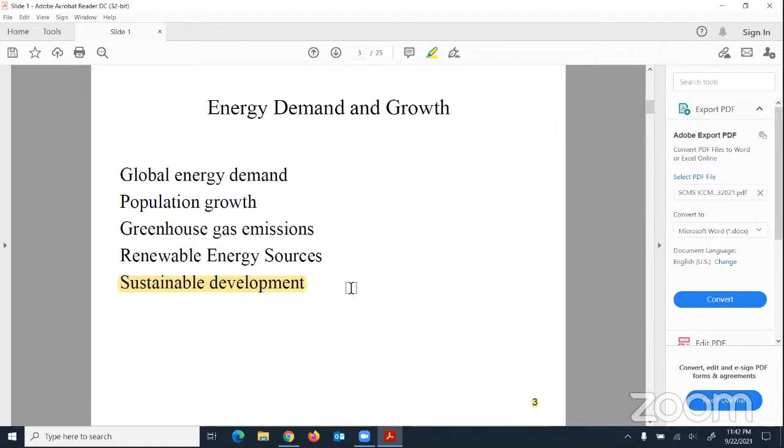I'll go over the first few minutes highlighting developments in the power plant sector. What you are seeing here is a steam power plant, which we teach in basic or applied thermodynamics. The point here is it works on a modified Rankine cycle. Over time, a lot of research has been done on this system to improve it further, so that even if it is coal operated, when its efficiency improves, emissions come down.

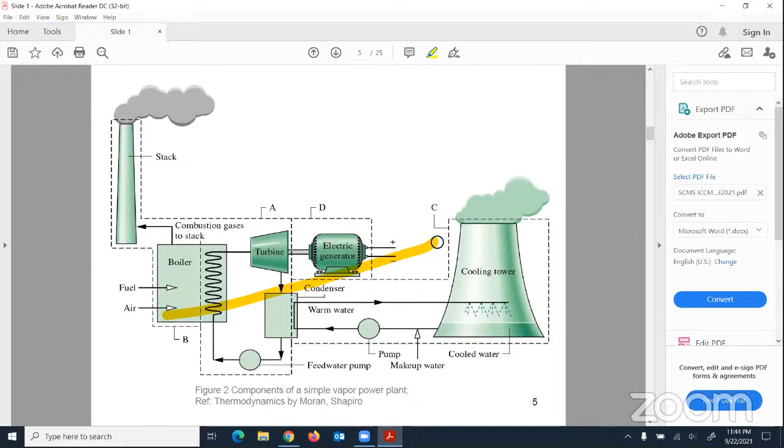Looking at the research investigations conducted and still being conducted, these are all aimed to improve steam power plant performance—cycle operating conditions optimization or modification, advances in blade materials, and their role in work output and efficiency improvement. Research is still being conducted in this area using thermodynamic knowledge to further advance these systems, and we can look at how different energy systems have been developed or advanced over time.

So if I go to the next one, you see there's a combined cycle power generation. Maybe before I highlight the details, I should explain what it is. In case of a combined cycle power generation, this is what a gas turbine cycle is. Here we have compressor systems.

The compressed air goes to a combustion chamber, represented here. Typically it is natural gas or gaseous fuel fed, so we burn the fuel. Depending on the gas turbine type, the air fuel ratio is controlled to meet the gas turbine temperature and operating conditions requirement. This is coupled to a generator.

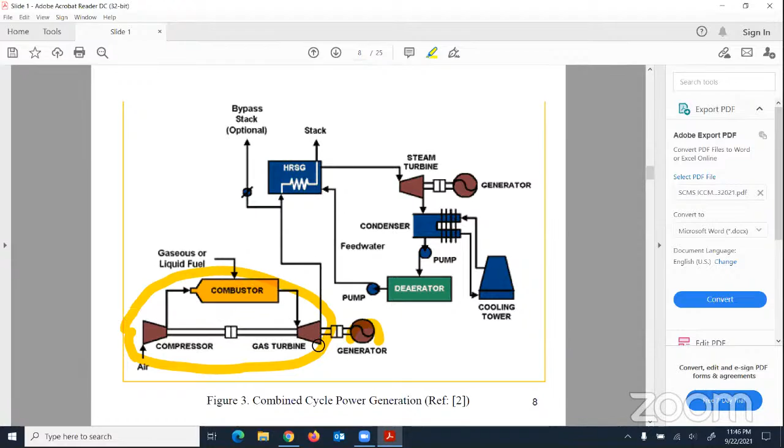When fuel is burned, the thermal energy and gases go into the gas turbine system where mechanical energy is produced that drives the generator, where power is produced. Now with time, as gas turbines become more advanced, the exhaust gases coming out of this system are at quite high temperature.

So there is a way to recover waste heat from those gases to generate steam. This HRSG stands for heat recovery steam generator, where part of the waste heat from these gases is utilized to produce steam, and that steam goes to a steam turbine system to which a generator is coupled, producing power with all the steam cycle systems.

One has an idea from thermodynamic knowledge. So if we observe, here the fuel is fed - this is where the energy input is. Power is generated using the gas cycle system. Then the waste heat from the exhaust gases is utilized; part of it is recovered to produce steam, and it is used as a working fluid to drive a steam cycle system. Together, this is what a combined cycle is.

These systems are growing a lot in popularity because their efficiencies are very high, given the way it is - it is a combined heat engine system. If you look at why they are becoming popular, it's because of higher overall plant efficiency, and if it is a natural gas fed system, emissions will go down.

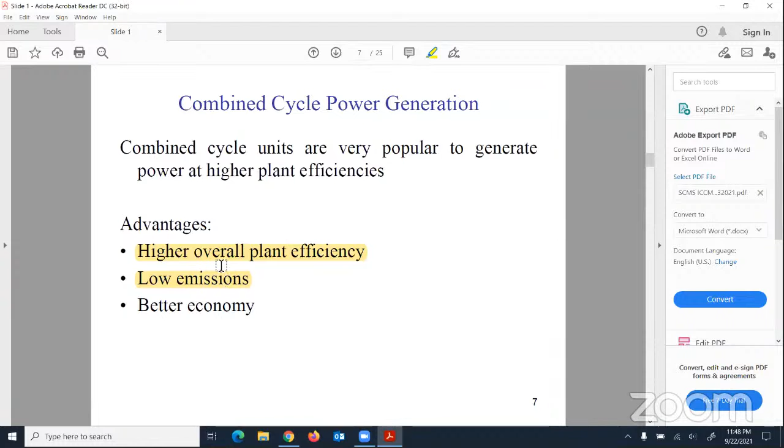And in many cases, the economy side is also good. So combined cycle power plant systems are gaining more and more popularity because of their higher efficiency, which helps not only produce more power, but with reduced emissions.

Now the question is, if it is natural gas fed, though we say it is a high efficiency system, there are still emissions associated with the gas. How can we reduce further, or how can these systems be modified, maybe utilizing renewable sources or biomass? That's what is typically called hybrid systems.

If we look into the developments taking place in this side, this is a combined cycle system as I showed in the previous slide. The modification being done here - please observe the unit - is a supplementary firing combustor, SFC. Here these are compressor systems.

The compressed air is coming from the compressor system before it goes into the gas turbine combustion chambers, where natural gas is fed like this. So biomass is burned. The compressed air goes through the system here, and that way part of the heat released when biomass is burnt in the SFC is captured by this compressed air, so its temperature will increase.

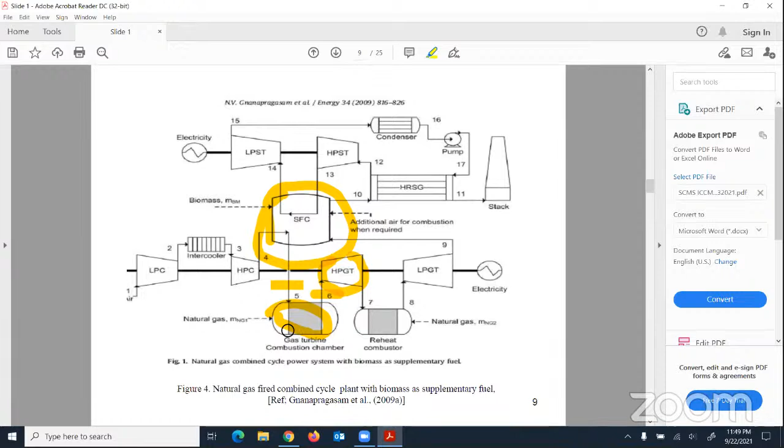Now for a selected gas turbine configuration, that means for the set conditions, since we are increasing the temperature of the compressed air with this operation, it needs less natural gas. The whole idea is the gas turbine system will generate power where the generator is coupled. This will go back to the HRSG and is utilized to produce steam, and the steam cycle will run.

With the previous combined cycle configuration I showed, what is being done here is it's modified to incorporate an SFC where biomass is burned. Depending on how much energy is fed and how much heat is recovered and utilized with the compressed air, the amount of natural gas needed is going to decrease. That way, CO2 emissions can be reduced further.

So these types of systems are seeing growing interest now. There's a lot of research being conducted, and in the literature you do find a lot of details because of this interest, and the way natural gas is now clubbed with biomass to reduce CO2 emissions.

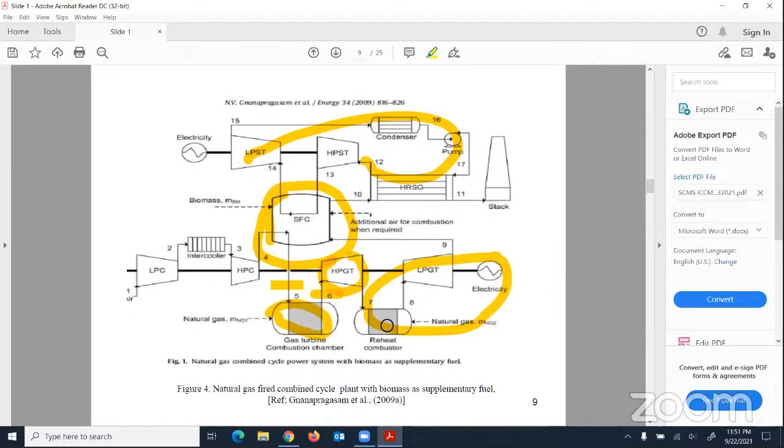There are studies, as I said, considering different biomasses. The investigations from the literature show that there is good scope to reduce CO2 emissions. The research that is growing now with combined cycles is not only to improve their performance, but to utilize biomass or solar energy in hybrid mode to further bring down the carbon dioxide emissions. So that is one area.

That's what leads to current research focus in these combined cycles: a lot of it is about how to utilize renewable biomass or solar with them, and that's where research areas are focused now. Not only that, in many cases, how to utilize even biomass in co-firing with coal to reduce emissions.

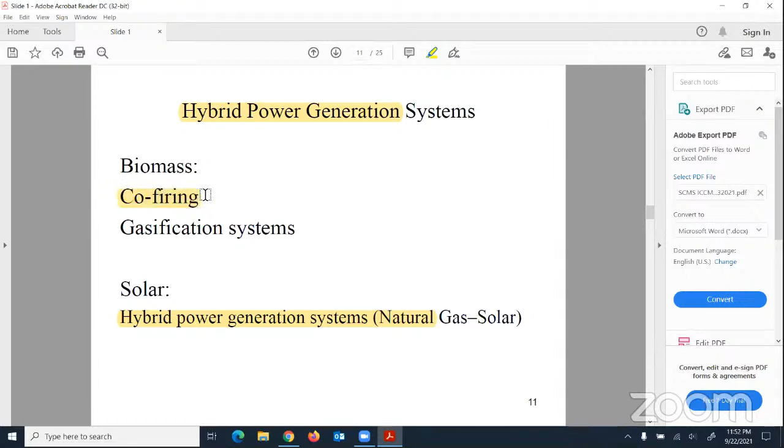So in whichever way it is, by having biomass in co-firing mode in a typical boiler system of a power plant, we can analyze and do all the calculations related to this. Whether we consider a particular flow rate of biomass into the boiler system, or for a fixed heat release rate, the coal and biomass flow is adjusted such that the conditions are met. This combination helps not only to utilize biomass, but to reduce CO2 emissions.

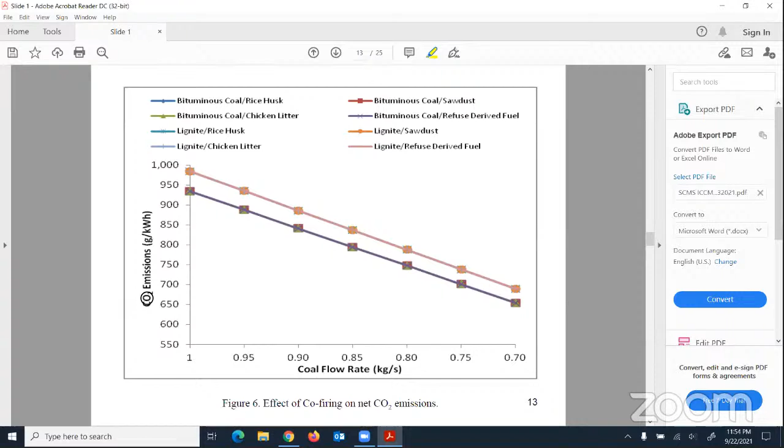This co-firing approach is becoming more and more of interest given its ability to reduce emissions and to utilize biomass. There's a good amount of literature and research details available. This gives an idea about the emissions, depending on how the biomass-coal flow rate is adjusted. As you can see, there is a tremendous amount of scope to utilize biomass in co-firing mode with coal-fired boilers in power plant systems, thereby reducing CO2 emissions.

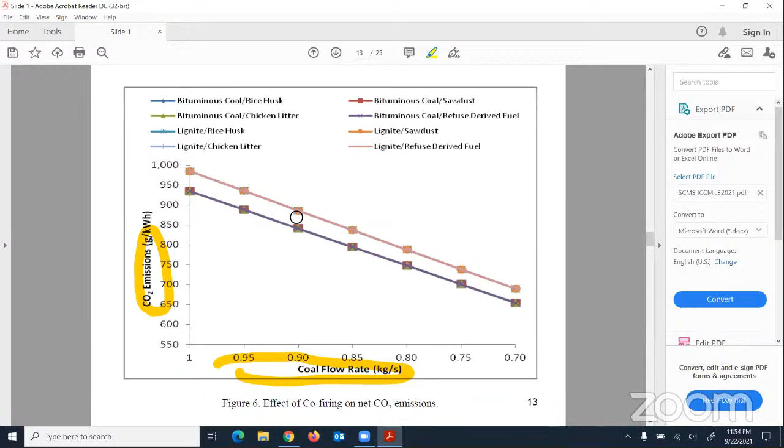The next area, in continuation from a basic steam power plant to combined cycle power plants, is how combined cycle power generation systems can be modified to make them hybrid using biomass or coal. Now what you are seeing here is a typical IGCC. A lot of research is going on in these systems. IGCC stands for Integrated Gasification Combined Cycle. Let us observe: typically, this is a gasifier.

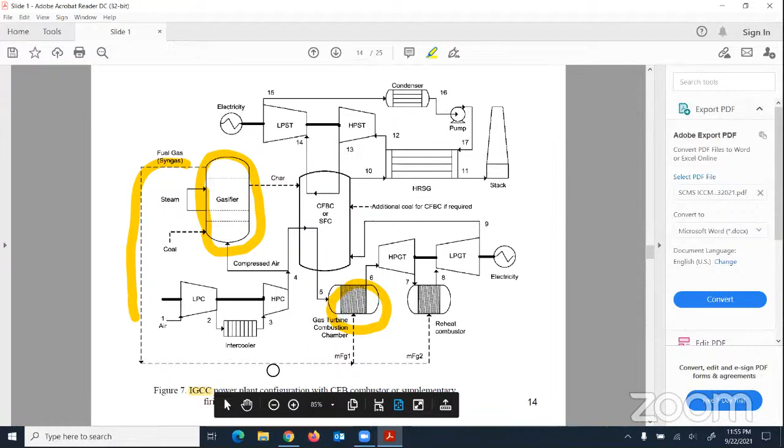Depending on the type of gasifier, coal is fed and steam or air is supplied. We are converting the coal into gaseous form, and it is cleaned. Now this gaseous fuel is taken to the gas turbine combustion chambers. One can estimate the composition of the gaseous fuel, its calorific value, all these details. Once we have the gaseous fuel, this is the gas turbine combustion chamber where it is burnt, and it goes to a gas turbine system.

This is a high pressure gas turbine system, then a low pressure gas turbine system with reheat combustion system, and this is where the generator is coupled. Basically, we are utilizing solid fuel, which is coal. It is converted into gaseous form, the gas is cleaned, and it's burnt in the gas turbine combustion chambers, and through the turbine system, power is generated with the help of the generator.

Now the exhaust gases are still hot at high temperature, so they could go to a heat recovery steam generator to generate steam that will drive a steam cycle. Or it can still have one more combustor system in between to feed heat to compressed air, depending on how many modifications or what sort of configuration we are going to utilize.

The idea here is, unlike a steam power plant with a modified Rankine cycle, the coal is gasified in a gasifier, the gas is cleaned, it goes to a gas turbine combustion system and drives the gas turbine cycle where power is produced first. The waste heat from the gases can be utilized in an HRSG to produce steam that will drive a steam cycle. So basically, this is operated in a combined cycle mode.

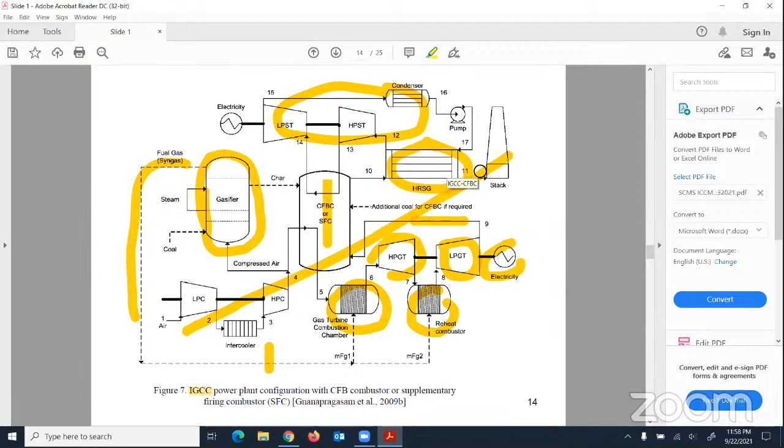This is where a lot of scope to do research. There's a growing attention. Many research investigations are conducted. So this offers a great scope, a future scope, particularly to utilize coal with combined cycle power plant configuration systems. These are highlighted. There are many areas to do research, from gasification details, analysis, modeling, to considering the type of systems, not only to produce power, but also to produce hydrogen, and how biomass can even be utilized as a supplementary fuel. The exergy analysis, which I will be speaking about, second law, a little later, many things can be done.

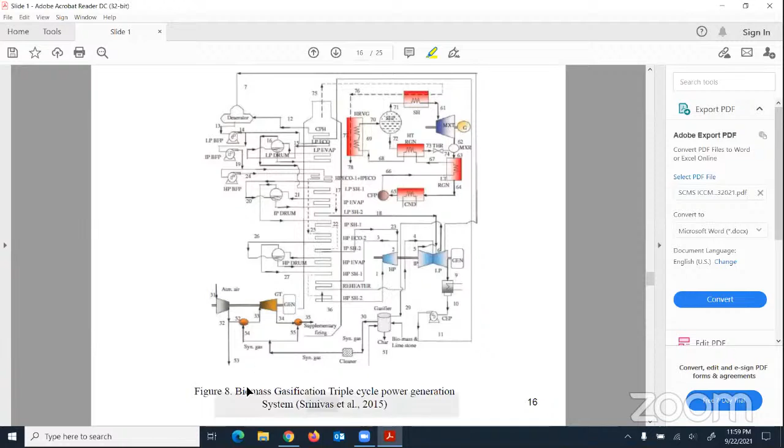Okay, so probably I'll continue with one more before I get into the second law discussion. What you notice here is I started showing with Rankine cycle power plant system, steam power plant. Then I showed combined cycle power generation systems, their modifications utilizing biomass. Even it could be utilized, it can utilize solar energy. Then I showed co-firing systems, then went on to talk about in the last slide about IGCC, integrated gasification combined cycles. So if you notice here, as the heading says, this is a triple cycle, good amount of research is going on now in these triple cycle systems.

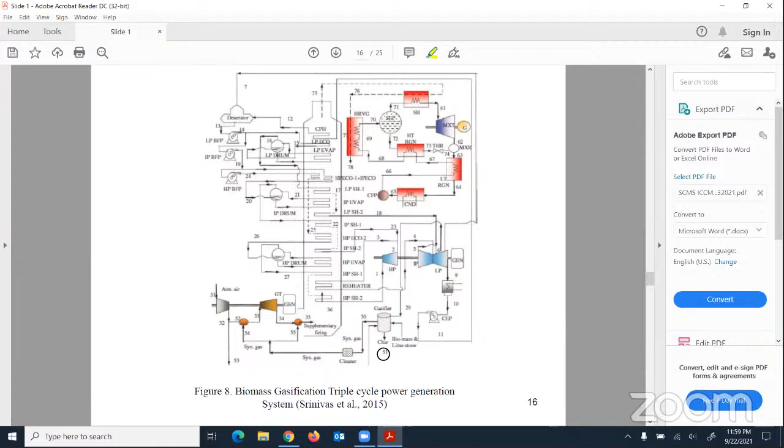So basically the idea is, let us say this one that is shown here from a research paper is based on biomass as a fuel. So this is a biomass gasifier, it is gasified, it is clean, and that is going to be utilized to drive, to burn in a gas turbine combustion chamber and drive a gas turbine power plant system. The waste heat will be utilized to produce steam and to drive a steam cycle system. What comes here extra is further down it is utilized with what you call a vapor cycle.

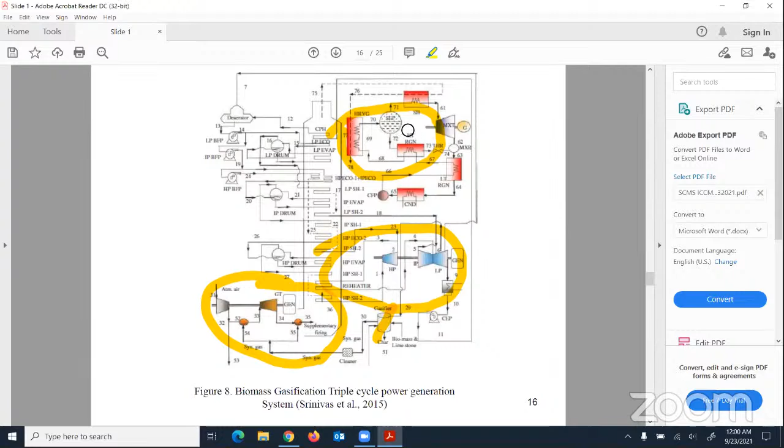This is not steam, please, a low boiling working fluid. So to produce power, basically using a Kalina cycle. So we have a gas cycle, a steam cycle, and a low boiling vapor operating cycle. Meaning this is a triple cycle from the same fuel source. So this is where now you see a lot of research is again conducted in the literature. So from a Rankine cycle to a combined cycle system, now research is being conducted and headed into a triple cycle power generation system. Thermodynamically speaking, the efficiency is getting improved a lot.

I know a system like this, not only thermodynamic investigations, we also need to look into economic details and many more. But as more details are understood, when economically they make sense, they are going to come into picture. I think that is typically the developments on the power plant systems that I wanted to discuss.

Now I will be discussing about the second law and what sort of impact it is making, why second law analysis or second law discussion is gaining a lot of popularity, why people are paying so much attention on second law. It's known, when we do system analysis which is based on first law, what is done is we try to make energy balance, we try to define, we try to calculate losses, efficiency. So this is how it is done, which is the first law of thermodynamics.

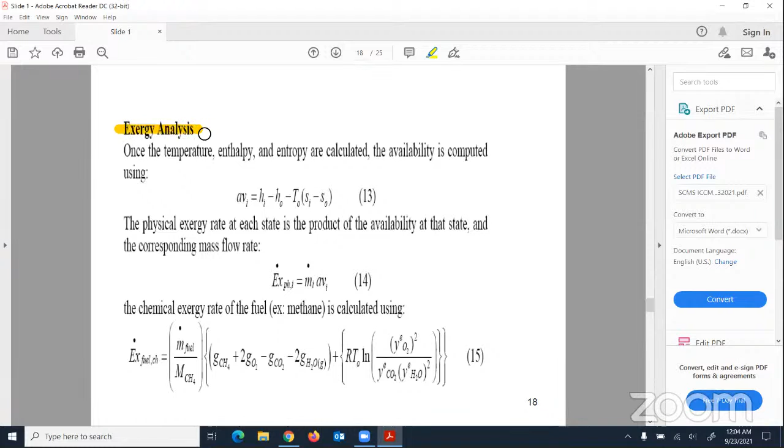So in exergy analysis, the procedure is, once we know at state points the values of enthalpies, entropies, those things, we calculate what is the availability. Okay, so the availability could be estimated. Now we estimate what is called the physical exergy.

The physical exergy is, if you take a compressor, when atmospheric air enters through it, at the exit of the compressor its conditions are different. The composition is the same, but conditions are different at high pressure, high temperature. So with reference to what we call the atmosphere or the dead state, it has the ability to do something. So that's the physical exergy, it could be estimated, and then the exergy associated could be calculated in this way.

Then let us take a combustion chamber in a combined cycle system. What is done there is air is supplied, let us say natural gas is fed as a fuel, and depending on the conditions, air fuel ratio is controlled, we burn it. So that means there we are getting into the chemical exergy side of calculations. There are many ways to calculate it, details are available. So the chemical exergy could be calculated using a form like this.

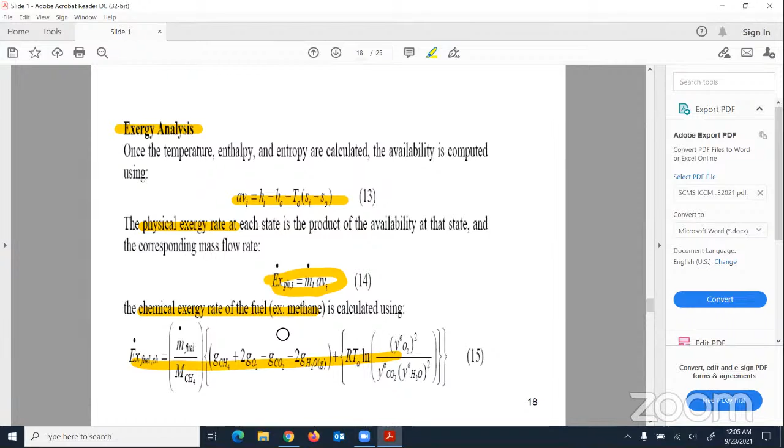So for a considered system, depending on the state, we calculate physical exergy, we calculate chemical exergy. As I already said, the exergy terms associated with kinetic energy and potential effects are usually small and people neglect them. So once the physical, chemical exergy terms are calculated, then the total exergy rate at each state, which is the sum of the physical and chemical, could be calculated. So the idea is, calculate the exergy values at different states, calculate the total exergy, then we define the performance.

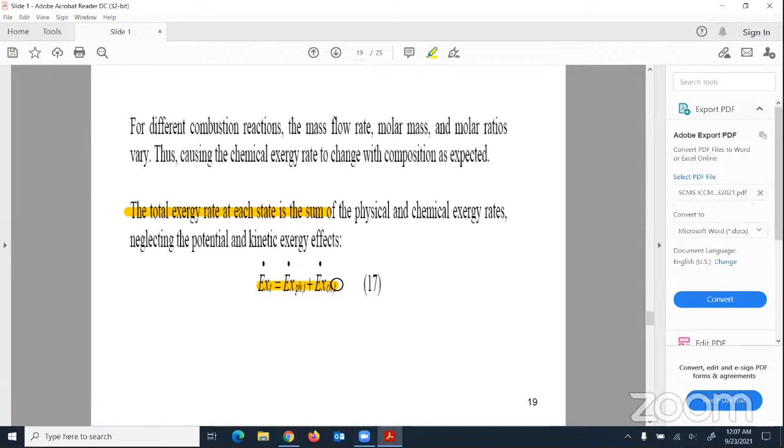When we define the performance, what is it going to provide? Why should we do the exergy analysis? What additional details will exergy analysis provide when we compare with energy analysis? Energy analysis, typically the first law of thermodynamics, where we make energy balances, we are not getting into the quality side of discussion. It is the second law of thermodynamics, or the exergy analysis, that is going to provide the quality side of the analysis and details. So how does it vary? What is the role of different conditions? All these details will come only through the second law analysis.

So this is just one example for a combined cycle, which has many components. Let us say there are a set of operating conditions that were taken. If we analyze for a heat recovery steam generator, we are interested to see what happens to the exergy losses and exergy destructions put together. That is through analysis, if it is represented, we see.

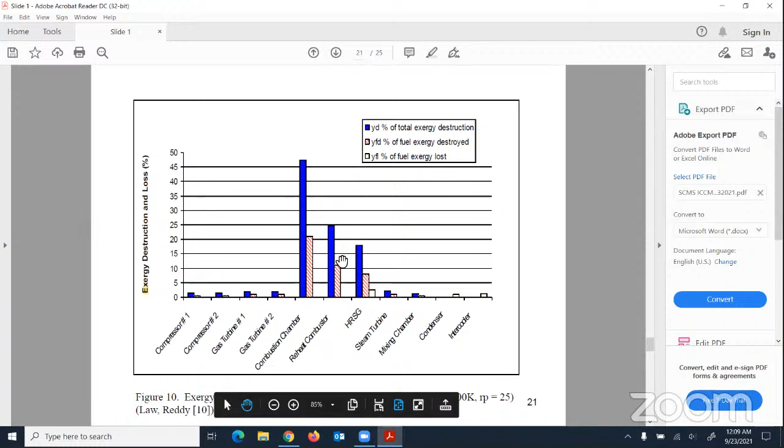These components have significant values associated. You see combustion chambers, you see the HRSG. This is where the exergy loss, particularly if it's combustion chambers, the exergy destruction happens. Because, you know why? If you take a main combustion chamber where we feed compressed air, natural gas is fed. Maybe I can take a look at one of those figures quickly.

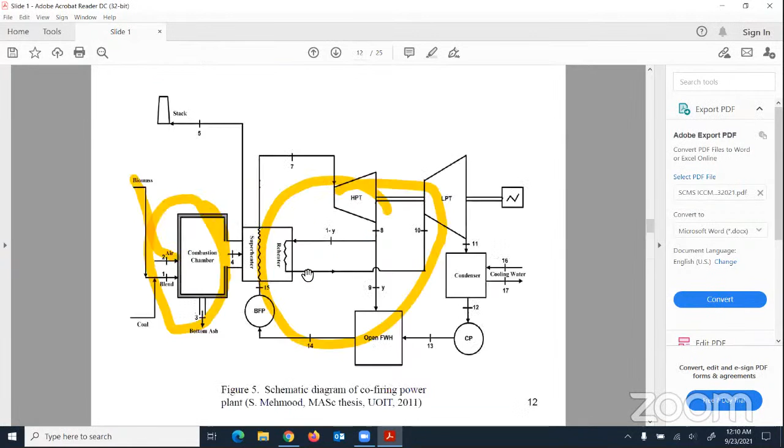Based on the type of gas turbine, we control the air fuel ratio to control the operating condition, because if the blade can withstand 1300 degrees centigrade, then we have to have the products, the gases, at a designed pressure ratio going at close to 1300 degrees centigrade. We are not going to feed too high.

So now, when we burn the natural gas with the correct amount of air fuel, the temperature associated with the products will be very high. Meaning the air fuel ratio will be adjusted in a way to meet the gas turbine requirements.

When we supply more air to bring down the temperature, which is a dilution, as we know, it is an irreversibility that contributes to entropy generation. That destroys quality. So if we look from the first law point of view, it doesn't bring out anything. It simply makes energy balances.

So we'll be making an energy balance. When we do the second law analysis or the exergy analysis, that's where we see how these different components are performing from a quality point of view.

That's exactly what is represented through research analysis and data here in this particular graph. There are so many components of a combined cycle system that are considered. And if we see these combustion chambers or HRSG, they typically show that in the combustion chamber there is a lot of exergy destruction, quality being destroyed, or in HRSG there's both loss and destruction.

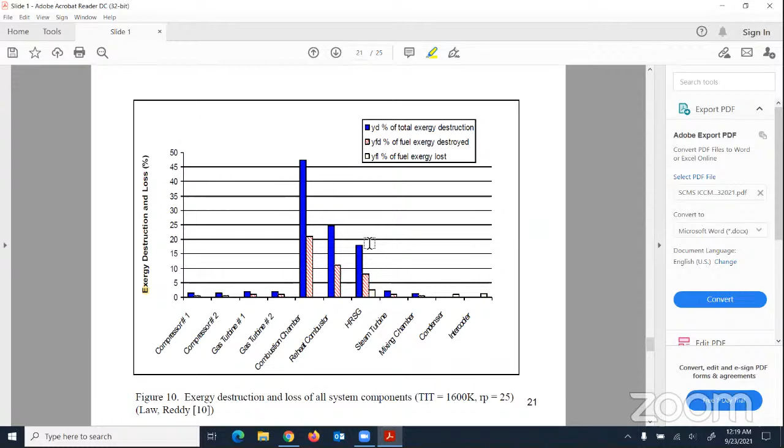So that way, focus can be paid to those components to understand them better, then find a way to improve them, which could be related to materials. As materials get advanced, these components' design or operating conditions could be modified. So the whole thing is going to be interrelated. So with the help of the second law, as more and more we understand and more research is done, if those are natural gas or coal-fed systems, this exergy analysis approach will ultimately lead to making them more sustainable.

This is where we see in the literature a good amount of research work is now focused, in different ways, whether through power production, power plant systems, or a combination of systems where we generate power and also generate hydrogen production. There are many approaches or methods that are developed leading to sustainable indicators.

If it is a complete renewable, let's say solar or wind, accounting for the material or other things related with those systems, generally they don't contribute any emissions. So if we give an indicator for them, then we can compare coal or natural gas systems, or hybrid versions of them. That is, if I have a combined cycle power plant where instead of natural gas only biomass or solar is fed, we've converted that into a hybrid mode. How do we compare this with a completely renewable type system? There is a good amount of research being conducted now on how to come up with these sustainable indicators, based on a different set of parameters being developed.

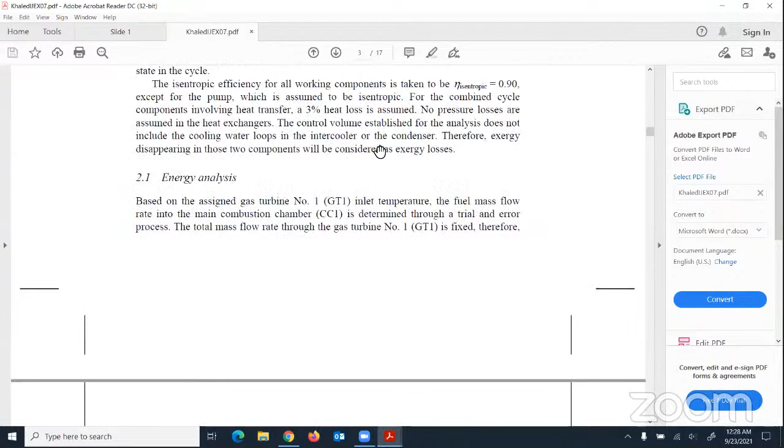So if you are wondering how we do the analysis, as my time was limited I could speak only a few details, but there are many research publications available. Suppose this is the combined cycle system we are interested in. In this paper, the whole procedure is given: start with energy analysis, make combustion calculations, state point calculations, then go to exergy analysis, define the physical exergy, the chemical exergy, get all those values, and define for the components all the efficiency terms based on exergy.

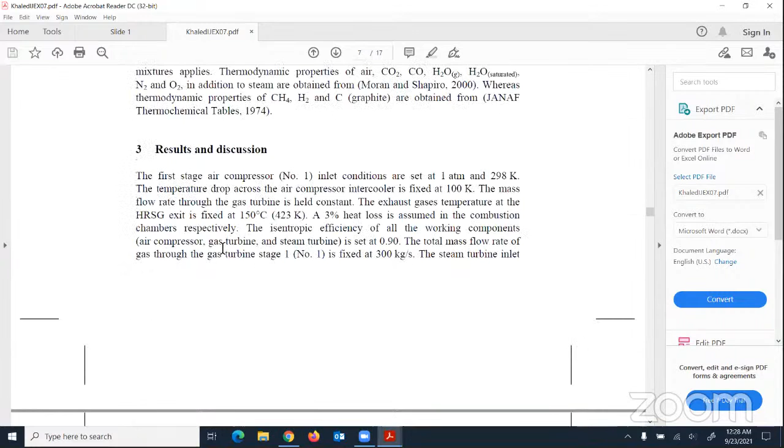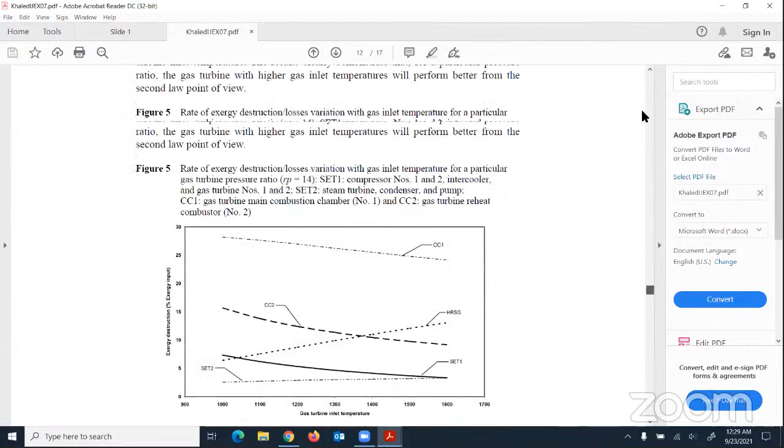Then a simulation program was developed based on MATLAB, and we ran the details to see all the parameters and their influence or impact. This particular article, if any of you are interested, is available, or you can find many such publications like that.

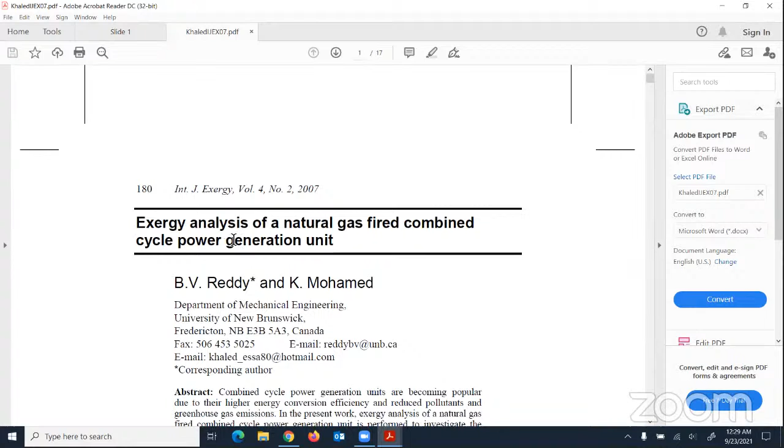The last thing before I stop for discussion is that this exergy analysis, as I pointed out, is gaining more and more popularity, as it brings more details from a quality point of view. Okay, I think this is where I will stop.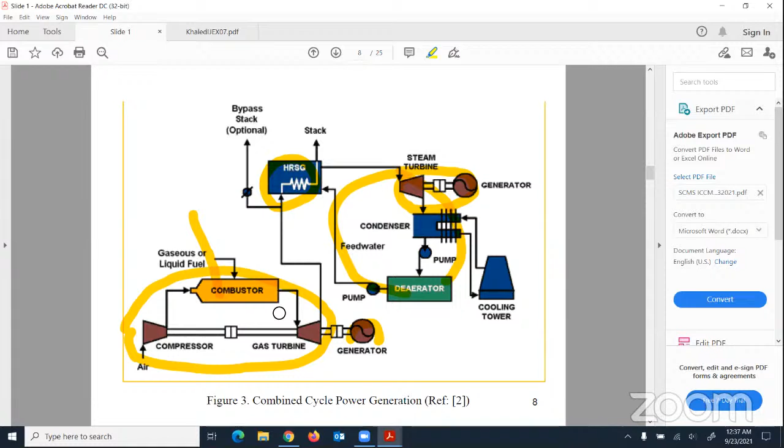Yes sir, yes sir. This subject, in fact, up till the first law, is purely mathematical, easy to comprehend. But when we start the second law, it becomes more philosophical. That is what I always felt. So I have so many doubts from that point of view.

That is what I asked. So all this, yeah, it is a very good question. You know what the second law is - it tries to tell you how the direction will happen, what the limitation will be.

Let me take another example, since you brought a philosophical word into the discussion. I will take it a little to that side. So let us take a water heater. If we bring water in a small container with a water heater, you are supplying electric power to the water. What happens? The water gets heated. You agree with me?

Okay, now you were utilizing the same electric power, feeding it to a laptop. So the laptop was working, maybe you are able to present your PowerPoint to your students and discuss. Now, if we go by the first law of thermodynamics, it will tell you: you are giving electric power to water, water was getting heated, so you just make an energy balance, take into account the losses. If it is satisfied, the energy balance is done. That is what the first law is.

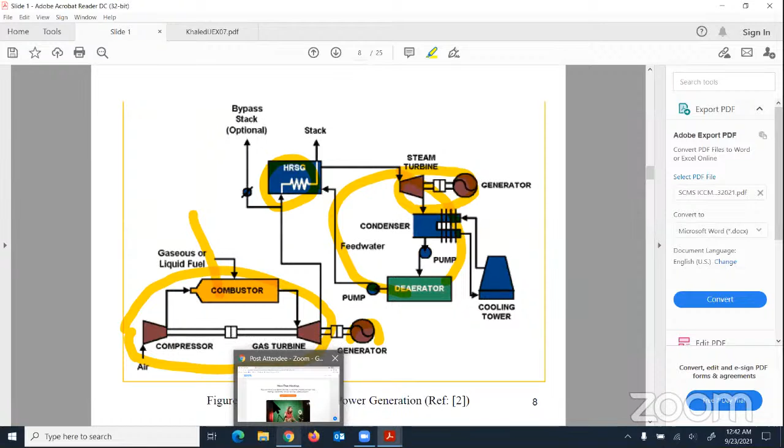Okay, yes please, any other questions? Yes. No, sir. Yes, that's great, sir, thank you. Thank you, sir. No, it's okay, are there any other questions please? No questions, no other participants. Let me see if I can put my video mode back. Are there any other questions please? Any more questions? I think you are very clear, sir.

If there are no questions, I will take a minute or two to share a few more thoughts. The research side has a lot of room. It doesn't matter whether you're into thermal systems, energy systems, or engineering in general, second law knowledge can be utilized to improve many systems further. It doesn't need big equipment or huge research facilities, it just needs the knowledge of the thermal side, and it helps bring out a lot of details when research is done.

A lot of the participants may not all be professors, there could be PhD scholars, masters students, or some from colleges. Whether you have facility or not should not restrict you from doing research. Simulation type work or analysis based on thermodynamics for different engineering systems could be conducted even with one student, and you can publish in conferences and journals. Once you're a lecturer or professor, we need to do research, and even with limited facilities, theoretical knowledge can support research that could be shared in these forums. I wanted to provide a little suggestion and encouragement, because research is what is needed now, particularly given the number of colleges and engineering students in India. Research should be conducted at a high level so it contributes to growth and development.

I think I'm audible. Yes, you are, sir. Okay. Respected guest, Professor Dr. Alam Mohammed Mahbub, other dignitaries and dear participants, once again a very good morning to all of you. With great privilege and pride, let me introduce and welcome Dr. Alam Mohammed Mahbub to this keynote session.

Professor Dr. Alam Mohammed Mahbub is a professor at Shenzhen Graduate School in Harbin Institute of Technology since 2012. He worked as a senior lecturer at University of Pretoria, South Africa, research and postdoctoral fellow at Hong Kong Polytechnic University, and lecturer at Rajshahi University of Engineering and Technology, Bangladesh.

He received his master's and PhD degrees from Kitami Institute of Technology, Japan, in 2001 and 2004, all in mechanical engineering. More than 180 technical articles are authored and co-authored, including 66 journal papers, most of which have been published in top-notch journals. He is the author of 2 books and 15 chapters in books.

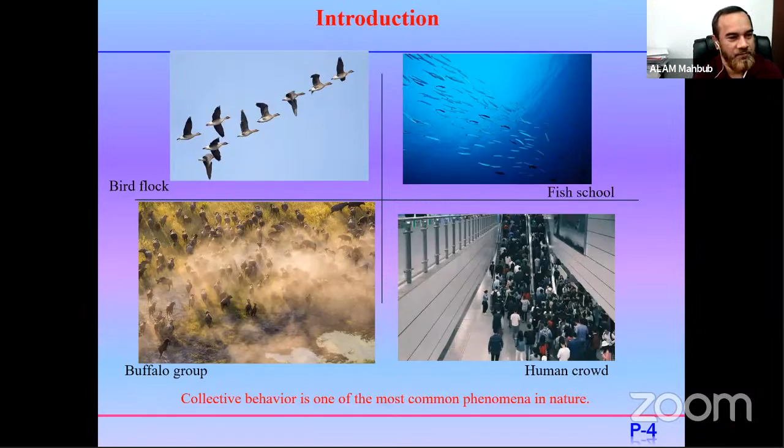Like why there is bird schooling, fish schooling - we need to understand why they move together. Even land animals like buffalo or deer also live in groups and move together. Definitely there is something - even in the human crowd. So why do fish or birds school? There are different things to understand: they do it for social purposes, for decision making or information sharing, they live or meet together, for mating and foraging, and definitely for survival purposes they live together, and also to survive from predators. And when they swim, to save energy they swim together.

So here we try to understand the schooling behavior of fish from the perspective of fluid dynamics, where the flow around two swimmers involves the most generic flow features for real fish. We cannot use a number of fish, so we use two representative swimmers, arranged in tandem or side by side, and see the behavior.

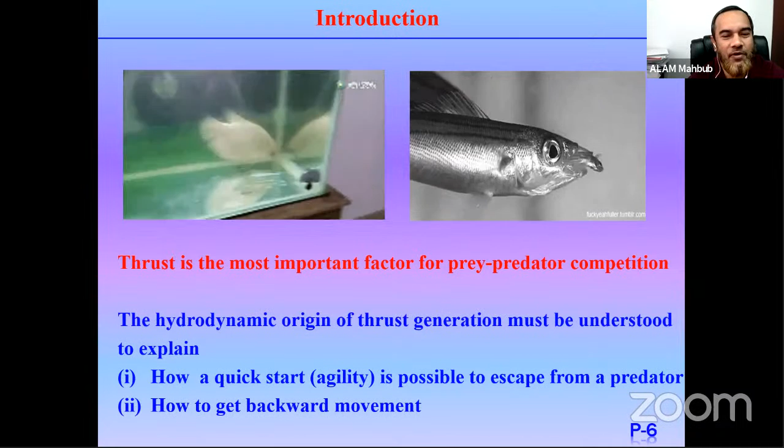Thrust is the most important factor for prey-predator competition. We have small fish and big fish - how does the small fish survive from the big fish? It is challenging, right? If you survey the literature, when the big fish approaches the small fish, the thrust for the big fish declines, gets less. On the other hand, when the big fish comes close to the small fish, thrust increases - the efficiency of the small fish enhances. So two things: the small fish thrust enhances and the big fish thrust decreases. That is why the small fish can swim faster when the big fish comes close. That is the fluid dynamic survival technique.

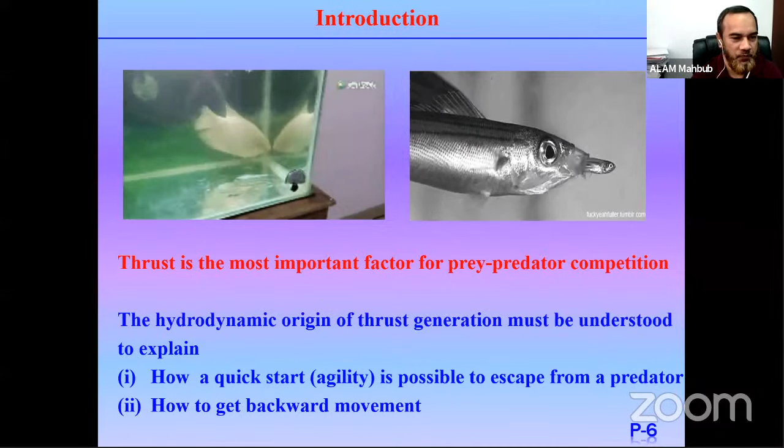We'll also see how a quick start, called agility, is possible to escape from a predator, and sometimes they need backward movement - how they do it. Let's see some experiments in the literature. Godoy-Diana did an experiment in a water tunnel, and they made a forced oscillation of a foil.

They found different flow patterns depending on the oscillation frequency and amplitude. Beal et al. put a D-shaped cylinder and placed a dead fish, like a robot, in the wake. The dead fish is not moving downstream; it appears in the wake, sometimes moving forward then backward, but it doesn't move away from the D-shape.

Similarly, a live fish can carry a dead fish in its wake. Sometimes live fish pull the dead fish into the wake and carry it somewhere.

Godoy-Diana changed the STD, which we can call the Strouhal number, or simply the frequency. The horizontal axis is the frequency of oscillation, and the vertical axis is the amplitude ratio, A over D, or simply the amplitude.

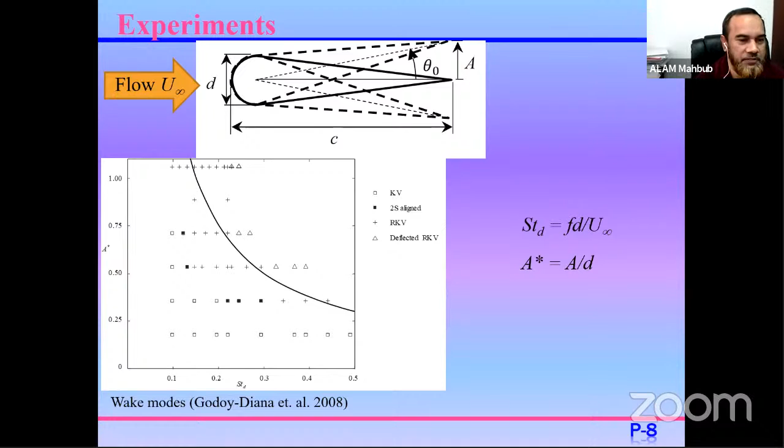We did a numerical simulation changing the STD and A-star, the oscillation frequency Strouhal number. We found a KV wake where positive vortices are on the lower side and negative vortices on the upper side - these are the general features of the KV wake.

Then we found, shown by the solid square symbol, the 2S aligned wake, where the vortices are on the wake center line.

Reverse Karman vortex forms when amplitude and STD are increased - at intermediate values of A-star and STD, we found reverse Karman vortex. In the video, positive vortices go to the upper side and negative vortices go to the lower side.

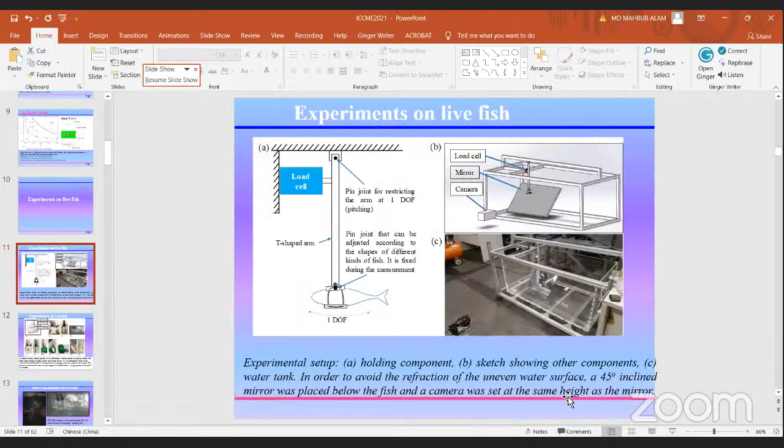Frequently I'm getting disconnected. I don't know how. In the last 1.5 hours, at least I got disconnected 4 times and automatically connected.

So I used first the solid frame to hold the fish, but it was not working, because when we are holding the fish using the solid structure, they don't want to move. So then I used a sponge to hold the fish to give a little comfort.

Sometimes in that case, the fish was always moving forward. When the front side is open, they always try to move on the front side, but sometimes not. So we tried to cap the front side of the fish, to cover it, to see whether it can move backward.

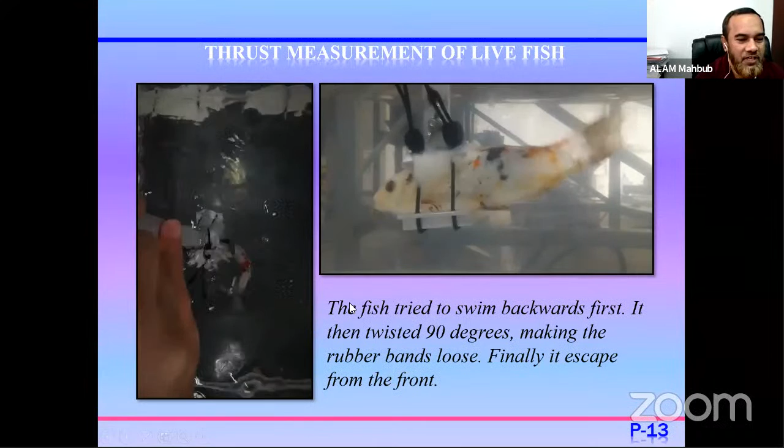And you'll see that for the first case, the movement of fish, it was trying to move backward, but held in place.

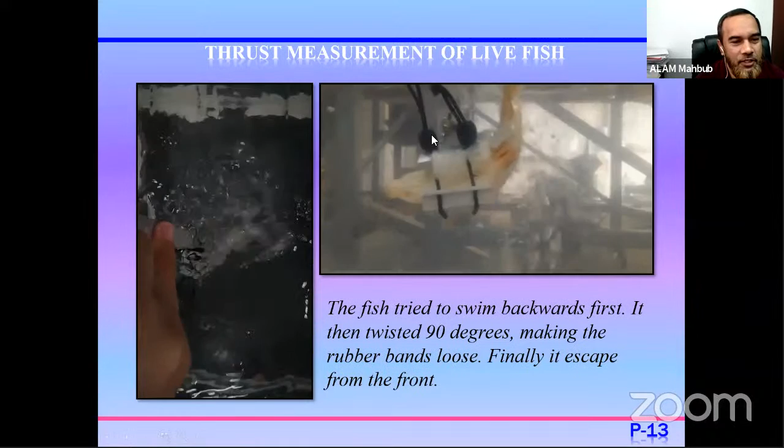We'll see later what is the movement of this fish's tail, what they do when they need to move forward. You can see here.

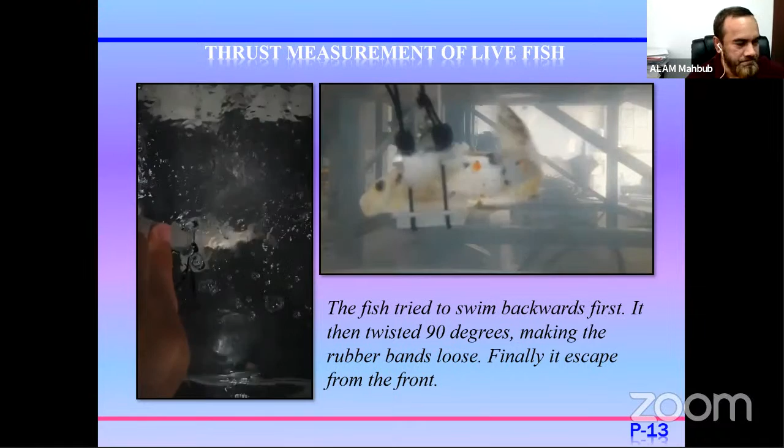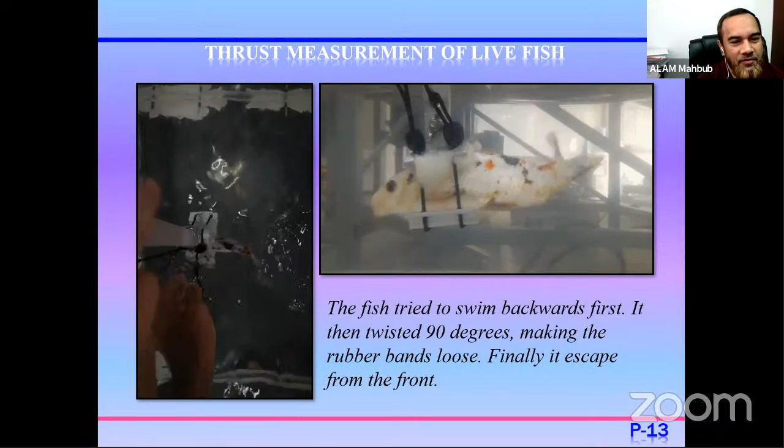What are they doing? Do you think the tail movement is sinusoidal, or sometimes one stroke is faster and another stroke is slower? Look carefully at the forward stroke and the difference between the forward and return stroke.

In this case, it did not try to escape because it was held tightly, since we tried to measure the forces using the load cell. We wanted to make the fish swim, but it was not.

When they know they can escape from the net or the device, they move or swim violently. When they don't know, or feel that it cannot escape, then they keep like this, taking breath.

And then we used a thread to hold the fish at the pectoral fins. It was swimming like this.

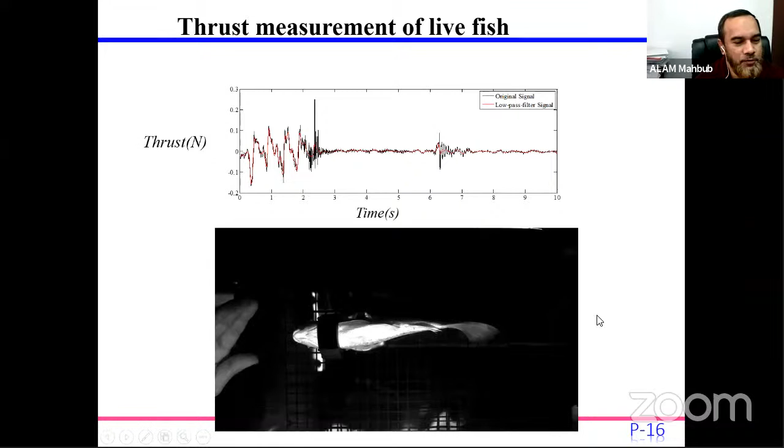Let's see this video here, what happened. When it moves forward, we have a large positive thrust. And when it moves backward, it creates a large negative thrust, particularly for the backward movement.

Then how do they move? You see, in the caption, the forward propulsion pattern - it was moving forward. We hold the fish using our hands, and if you just give comfort to the fish, it can move forward.

So we wanted to know the caudal fin oscillation during forward movement. What we see here is that for forward movement, the tail moves faster from the large amplitude toward the center.

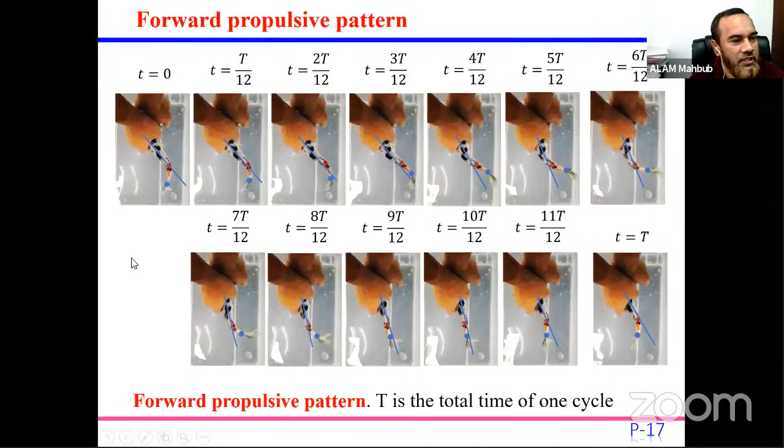We'll make a plot here and draw a graph later, you'll see. And for the backward movement, the case is opposite.

For this case, it keeps the tail like this, and we found that the forward stroke is faster. Here, this one is the forward stroke, and it was faster.

That means they try to push the water forward, and the fish itself moves backward. You can see the clear picture here.

For forward swimming, the motion from here to the center line is faster, and the motion from the center line to the large amplitude is slower. We'll call this the return stroke, and this is the forward stroke. So the forward stroke is slower and the return stroke is faster for the forward movement.

And for the backward movement, the case is opposite - now the return stroke is slower and the forward stroke is faster.

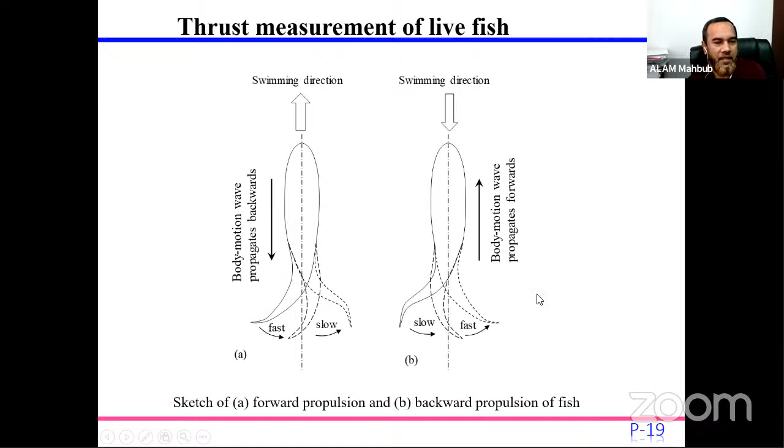Now first we'll discuss the symmetric oscillation of the airfoil. This foil, something like this. With the Reynolds number until 200, there's totally laminar flow, so we use 2D simulation.

Now we define here the definition of symbols, like CT bar means the time mean thrust. This normalization is as usual, very common. And the input power coefficient is CP bar, that is the time mean input power coefficient. And then the efficiency is the CT over CP.

Then STD is the Strouhal number based on frequency and D. D is the thickness of the foil, maximum thickness. Here you can see is the chord length of the foil, small c is the chord length. So there are three definitions of Strouhal number. STD means thickness based Strouhal number, STA means the amplitude based Strouhal number, and STC means the chord length based Strouhal number. A star is the amplitude ratio.

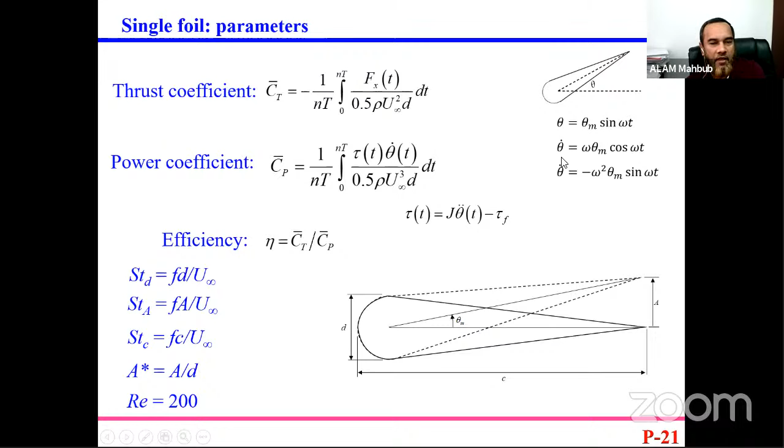And here we put sinusoidal oscillation like theta equals theta m sine omega t, and theta dot, and angular acceleration are like this. That's the common things.

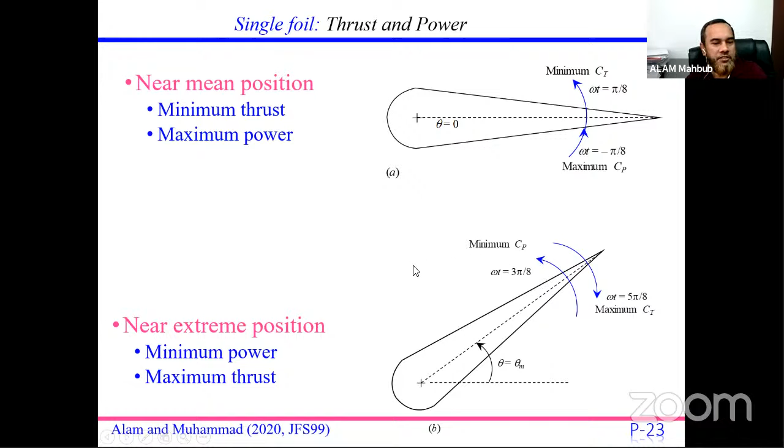Now we'll see the dependence of thrust, power, efficiency on the STD and A star. How the Cp or Ct changes with changing A star and STD. First is the Cp. With increasing STD and A star, Cp is increasing continuously. This dash line is the drag thrust boundary. Ct also increases accordingly, following the increase of STD and A star. Efficiency also getting better with increasing STD and A star.

Efficiency increasing, but look at the rate of thrust increase with rate of power input. Definitely, if you give the power input, the thrust will be large - that is the conventional case, everybody will understand. But the rate of power input versus rate of thrust is the important thing.

So dCt over dCp, you will see here we have the maximum, like STD about 0.25, and it is almost independent of the amplitude.

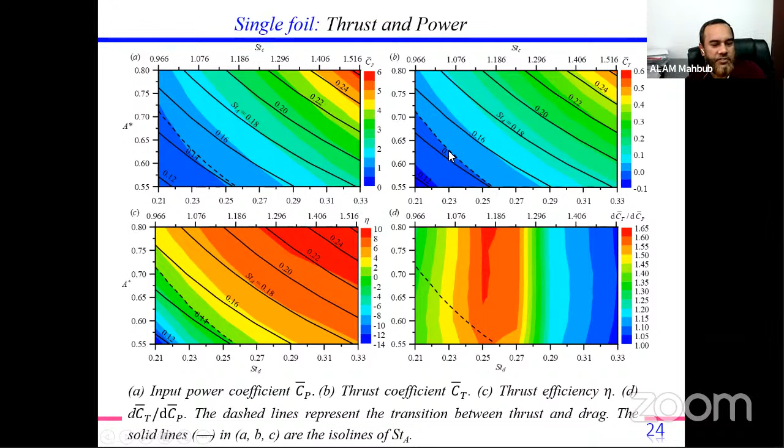Then we did some mathematical analysis of why we need more power input when we increase A star and STD, why we are getting Ct increasing with STD and A star.

We can assume the hydrofoil, like a flat plate, is oscillating sinusoidally. Then we can assume, though the foil is submerged in the fluid, some added mass - this element of fluid is actively moving with the foil, or we can say this is the equivalent amount of fluid that plays a role in the foil dynamics. So we use a wedge-shaped fluid.

If we assume this fluid is moving with the foil, then it has different kinds of acceleration. Because the foil has acceleration, it has Euler acceleration. If the fluid is attached on the foil, then definitely we have also the centrifugal acceleration on the fluid. And also we have Coriolis acceleration, because the fluid has lateral movement and also movement along the foil, like the streamwise movement of the fluid. So we have three kinds of acceleration, and these three accelerations have contribution to different parameters - we'll see here.

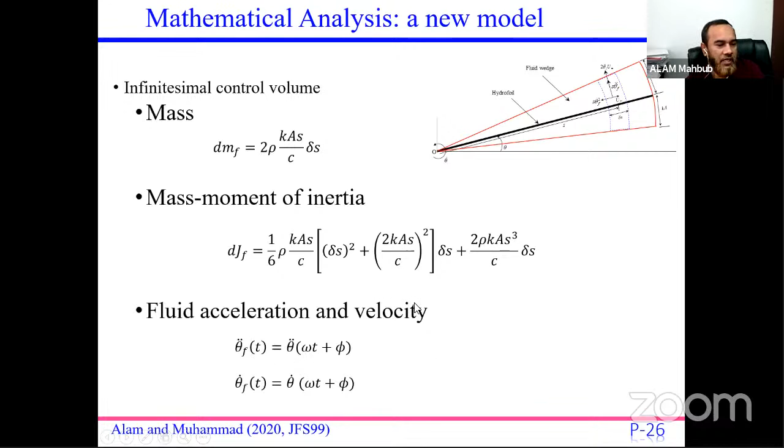Consider this elemental mass - dmf is this one, and we have the Euler acceleration or also centrifugal acceleration like this. Then we have the mass moment of inertia of this elemental fluid. This is already published in the paper, so if you have any questions or lack of understanding, you can refer to this paper. Then the fluid acceleration and velocity is this.

So torque is mainly related to power input, and it is connected to Euler acceleration and Coriolis acceleration. Considering the Coriolis acceleration and the Euler acceleration times the corresponding fluid mass moment of inertia, we found the torque involved.

And for the thrust cases, definitely when the fluid is moving, we have the centrifugal force on the fluid moving along the foil. Then we have the thrust generation. For this thrust generation, we found the final form.

The CT is a function of STA cubed over STC. Here CD0 bar is the drag on the non-oscillating foil, that means a fixed foil - CD0 bar is actually the drag on the fixed foil. So CT must overcome CD0 to get the absolute thrust.

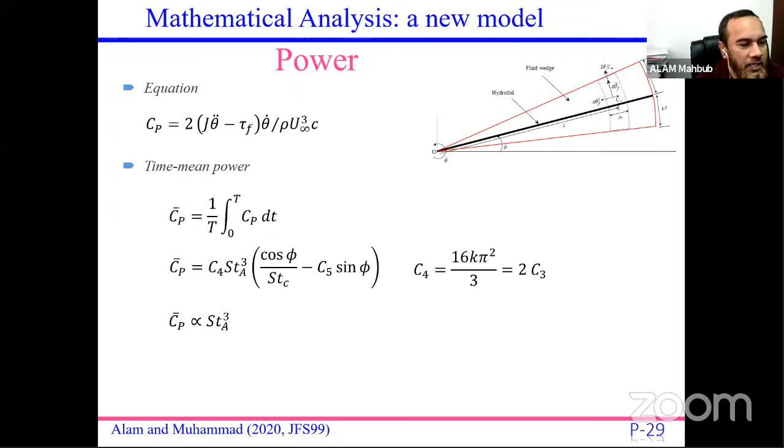From this analysis, we found CT varies with the cube of STA. Later we'll see the simplification of the power equation - we found this is the final form of the power equation, and CP is proportional to STA cubed. Now let's see this mathematical analysis result - the efficiency is inversely proportional to STA cubed. Later we'll see the real data, how they behave.

So we accumulated all possible data and plotted CT versus STA cubed over STC, and we found a linear function - this is essentially what we found here. CT, if you consider STC as fixed, more or less constant, then we can say CT bar is proportional to STA cubed.

Here we found CT is proportional to STA cubed over STC, and we have proved mathematically that CT bar is proportional to STA cubed. All data converge on this line, meaning our mathematical analysis or model agrees with the data from the literature. Similarly, efficiency does the same - efficiency is inversely proportional to STA cubed.

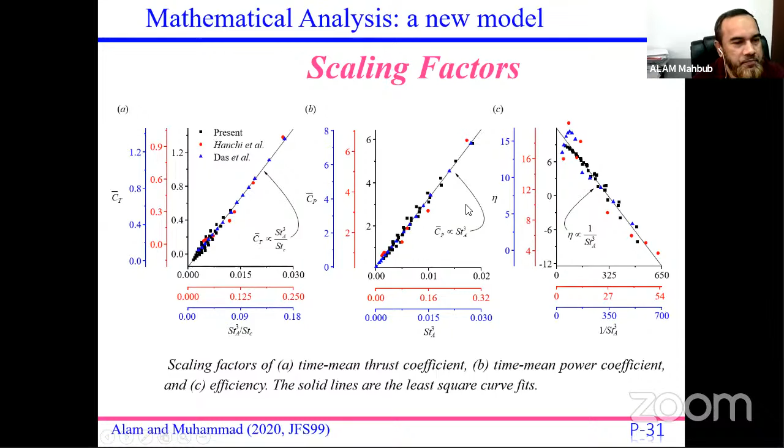Now, asymmetric oscillation. Previously it was symmetric, sinusoidal oscillation. But in experimental observation, we found a different kind of oscillation: asymmetric oscillation.

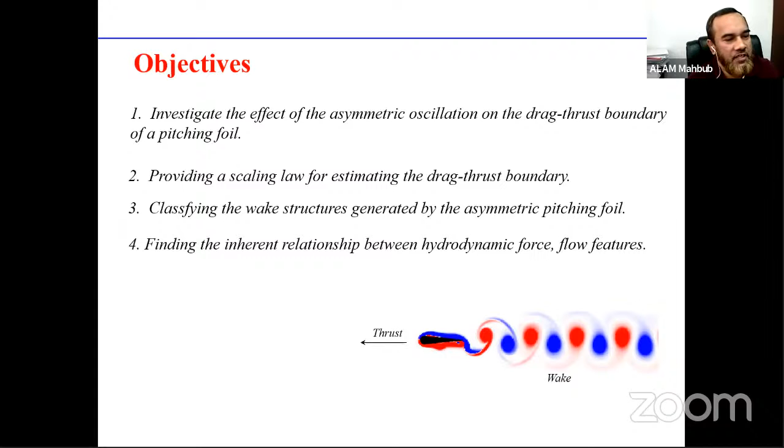Sometimes the forward stroke is faster, sometimes the slower stroke is faster, depending on their turn or movement. So the objective is to investigate the effect of asymmetric oscillation on the drag thrust boundary, provide a scaling law for estimating the drag thrust boundary, classify the wake patterns, and find the inherent relationship between hydrodynamic force and flow structure. What we did here is numerical simulation.

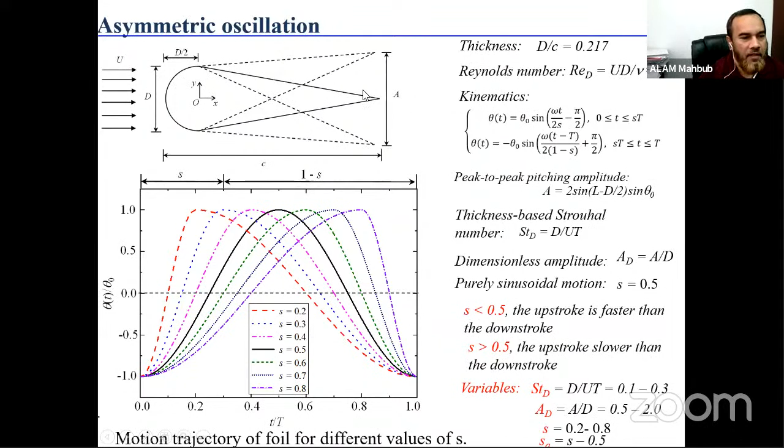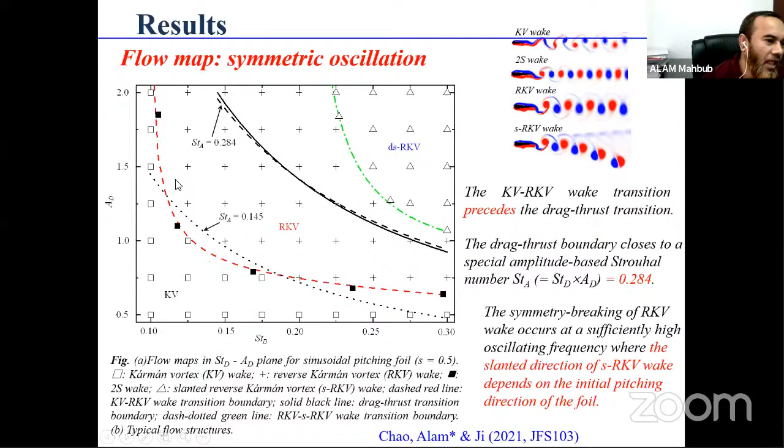What you'll understand is that S of 0.5 and 0.6 are essentially the same, except here we have the DS reverse Kármán vortex state. DS means downward slanted, and this is upward slanted. For this case, upward or downward slanted depends on the initiation of foil oscillation. If the foil oscillation initiates from upward, then we get downward slanted wakes, and vice versa.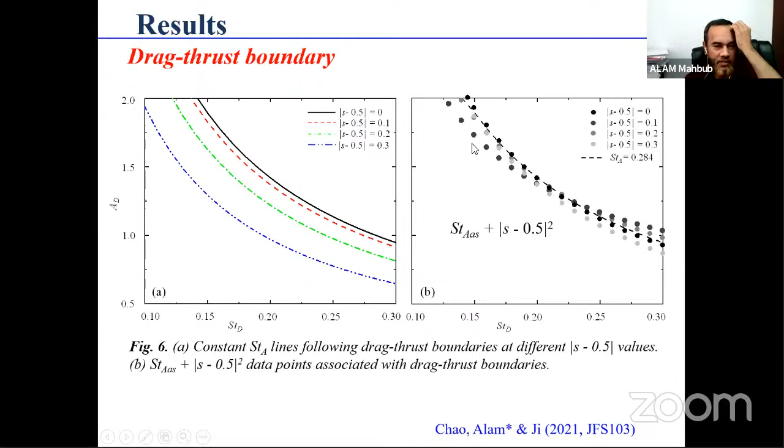So why is CT thrust increasing? Let's see the stroke-wise thrust and power, and also the CL, the lift coefficient. This is the stroke-wise, the faster stroke.

For S equals 0.2, for the faster stroke, the variation is large, from positive. For the slower stroke, the variation of CT is small. If you consider the time mean thrust in the faster stroke and slower stroke, the faster stroke is bigger than the slower stroke. The slower stroke looks negative. So mainly the faster stroke is causing the thrust to be positive or increasing.

This same phenomenon was observed for different asymmetry parameters. When the asymmetry parameter is 0, it is sinusoidal, and the forward, faster, and slower strokes are the same.

Then we plot the thrust and also power for FS meaning faster stroke, and SS meaning slower stroke. The time mean thrust in the faster stroke is always larger, making the whole time mean CT bigger with decreasing S.

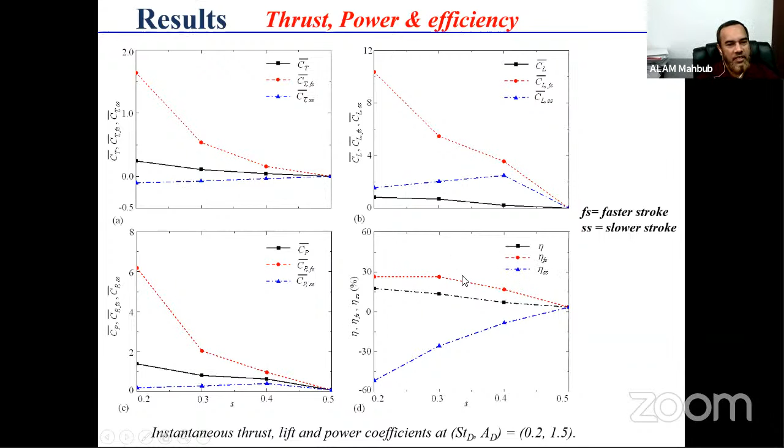For the symmetric oscillation, on the upper side and lower side, the maximum relative velocity is the same. But for the deflected or slanted wake, they are different. The upper side is smaller than the lower side when the wake is deflected or slanted downward.

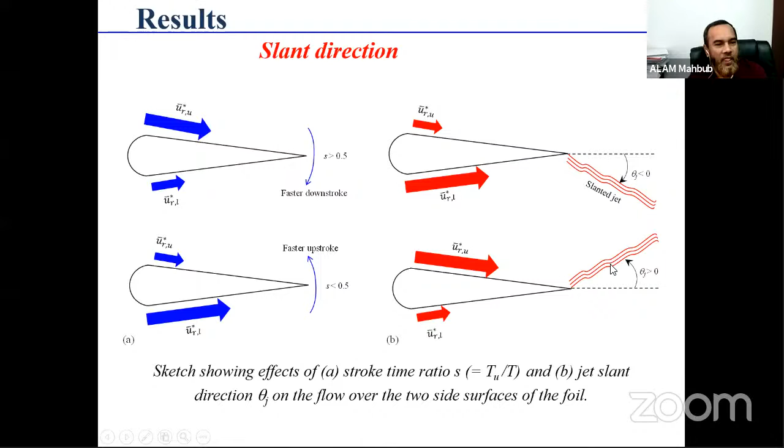Now, asymmetric oscillation type 2. Now it is different, now it is stroke-wise. If you see here, from here to maximum is the forward stroke, and maximum to the mean is the retract stroke. So forward and retract strokes are different, faster and slower. Previously, it was the downstroke and upstroke that had different velocity.

Now the forward stroke and retract stroke are different. So this one is similar to this one, and this one is similar to that one. Again we define tau as the ratio - we can say this is the asymmetric parameter. Tau equals T1 over 4, divided by T over 4, that means T1 over T. That gives how much the forward stroke is faster than the return stroke. So this tau gives that ratio.

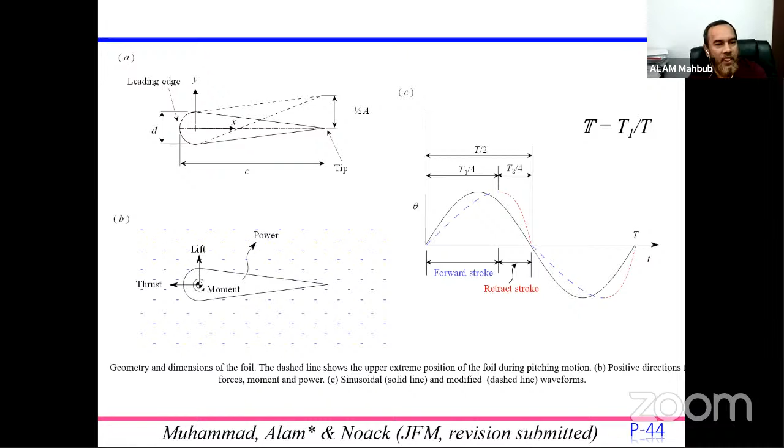Again, we see for different values of tau, the kinematics or trajectory of the foil. For tau equal 1, the oscillation is symmetric, purely sinusoidal.

But for small tau, less than 1, like 0.8, we have the forward stroke faster and the return stroke slower.

Similarly, at tau equal 1.2, you see the forward stroke is slower and the return stroke is faster. So I believe you have understood the difference between type 1 and type 2 asymmetric oscillations.

This is the polar plot or phase plot of CT and CP. The red line corresponds to the thrust, the blue line corresponds to CP, and the solid black line is the phase portrait, meaning the relationship between velocity and displacement. So this is the phase portrait of the oscillation.

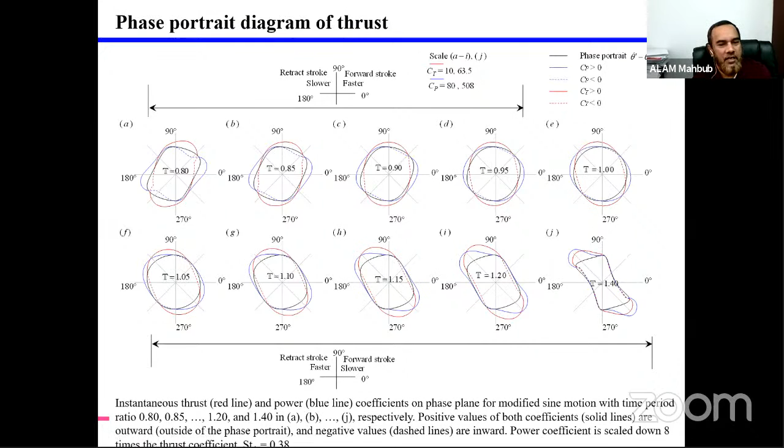We can explain this here. We have seen there are different scenarios - sometimes CP and CT are both positive, sometimes both negative. There are different force scenarios: CP is positive, meaning giving power input, but we are getting CT negative. That we don't expect - we are giving power input, but CT is negative, meaning drag. So this is the undesirable condition.

When CP is positive, giving the input, we are getting the thrust that we expect - so it will be normal swimming. When CP is negative and CT is positive, that's not the real case - no power input, like negative power input, but getting thrust. That is the ideal case. And the floating condition is when CP and CT are both negative.

This is the Rose diagram for this condition, showing how it's changing - for tau equal 1, tau 0.8, and with increasing tau. When the asymmetry is large, we have a very strong normal swimming condition, with both CP and CT lying in the retract or return stroke, which is the faster stroke. The opposite happens at smaller tau.

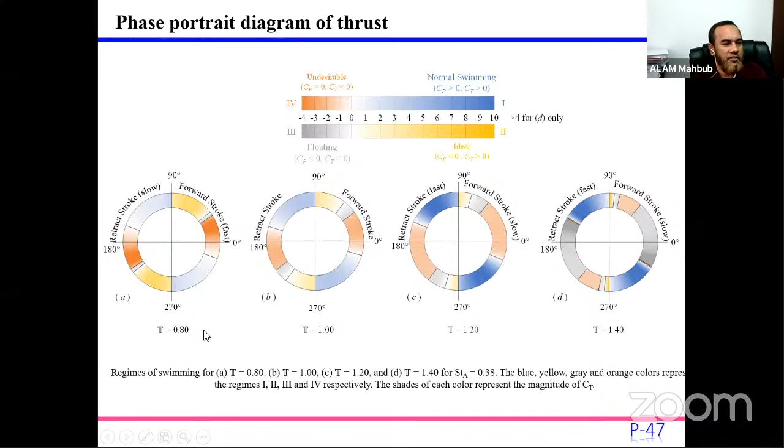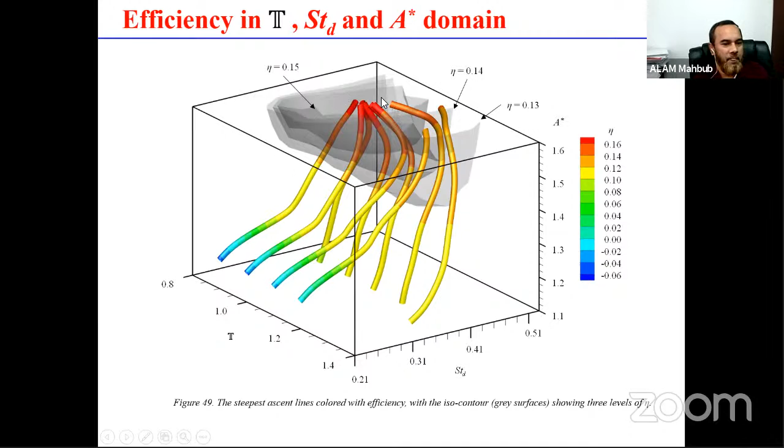This could be understood from the steepest ascent diagram, where we approach efficiency of about 0.15 for different lines, different cases. This is the optimum STD and tau for the different cases with higher efficiency.

Now I'll give you a brief introduction to two foils. We use two foils for fish schooling, giving symmetric oscillation or in-phase oscillation, phi equals 0. Two foils oscillating in the same direction and opposite direction - two foils moving like this, and two foils moving like this. This is the antiphase and this is the in-phase oscillation.

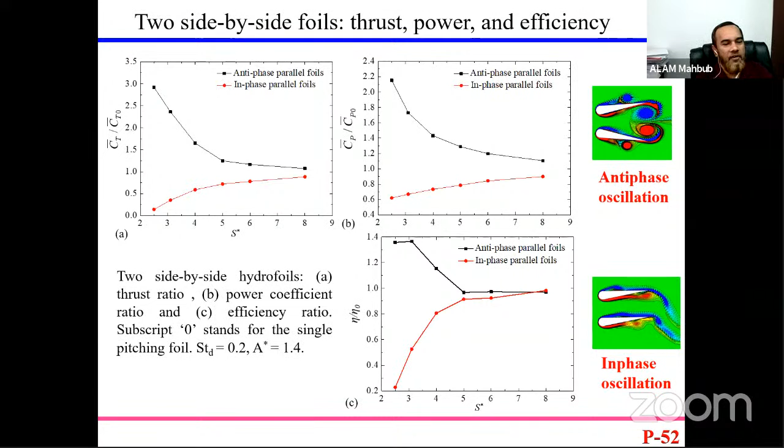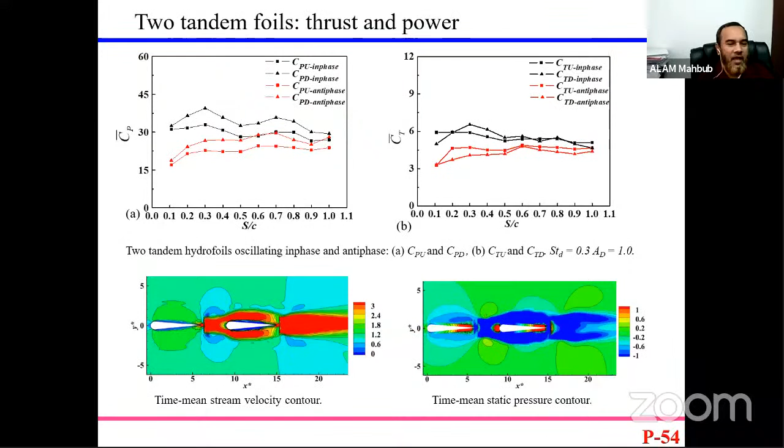So for the tandem foil, again, CPU and CPD, U means upstream, D means downstream, in-phase and antiphase. Now the case is opposite. You see now the in-phase oscillation have higher power and also higher thrust. So two inline fish, one fish lying in the wake, then they both will swim in in-phase fashion. That will give them comfort with higher thrust.

Here is the wake structure for the in-phase and antiphase oscillation. So if we case the total performance for the tandem foils, we see again the in-phase has higher CP. Total means upstream and downstream fish, for both cases, total CP.

Then we see the total power is higher for in-phase oscillation. Also CT is higher for the in-phase oscillation. But the efficiency is not the case. Efficiency is the opposite.

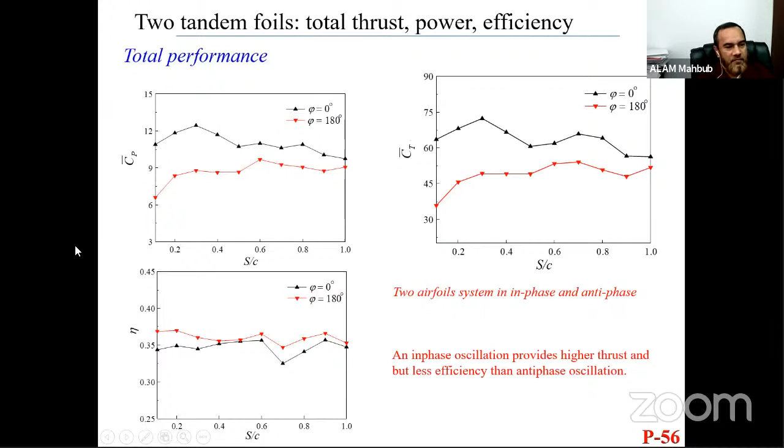So if we make the conclusion, the instantaneous thrust is maximum at inflection point of power. Thrust is maximum near the extreme position, just when it tends to return. More power is required to move the hydrofoil from the extreme to the mean than the other way around.

And we found mathematically this scaling law, and this scaling law fits with the experimental and numerical data. For side-by-side foils, the antiphase oscillation gives more thrust and also more efficiency. For tandem foils, the upstream foil has more efficiency than the downstream foil, and overall the in-phase gives more thrust.

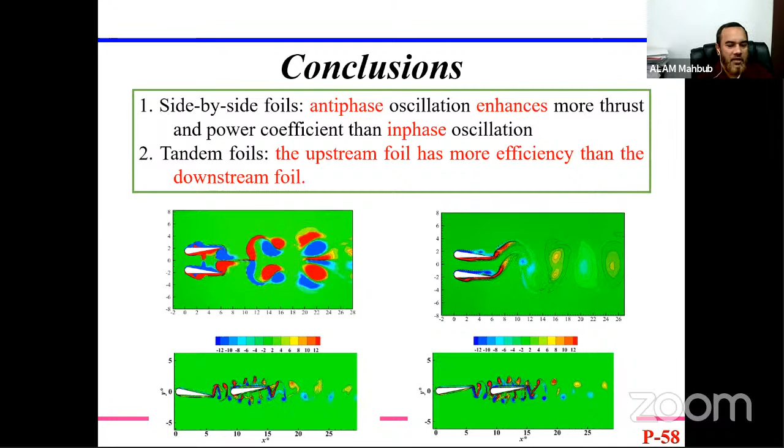Thank you very much for your kind attention and presence.